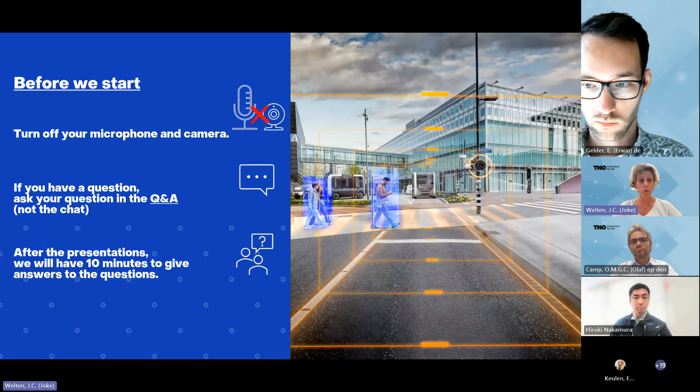So what's the program of today? Olaf will start with a short introduction to safety assurance. Then Erwin de Gelder will talk about the regulations and standards. We have a guest, Hiroki Nakamura from JARI, and he will talk about the Japanese AD safety assurance regulations and standards. Afterwards, Erwin will talk about the opportunities, and we will close this session with the Q&A.

I would like to give the word to Olaf, the Senior Consultant on Scenario-Based Safety Assessment and Methods at TNO. Yeah, thanks a lot, Joke.

Today my task is to give a short introduction to the main topic, which will be standards and regulations around safety assurance of automated driving. I would like to do that by reflecting on our webinar from June 3rd, the first in this series, where we discussed safety assurance of automated driving systems, and especially the complexity around answering the question of whether an automated driving system is safe or unsafe. That is a complex question because of the ecosystem that the AD system needs to work in.

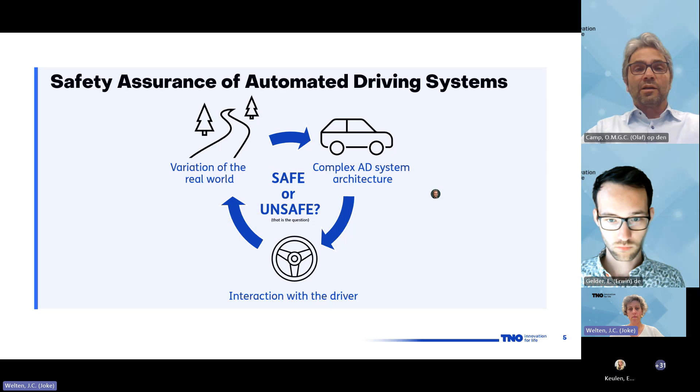So what did we learn from the first Meet the Expert session? First, we discussed different concepts of safety for automated driving systems. We were also happy to have a guest from Volvo Cars, Mikael Ljung Aust, who shared the considerations that Volvo takes in developing AD systems.

He mentioned that specifically for the safety argumentation, there are two points that need to be dealt with. First, an AD system should not repeat the errors that humans possibly make on the road—in that way we could move away from the typical human errors that cause conflicts on the road. But on the other hand, since a new system is being introduced, we should avoid that this system also makes new, so to speak, robot type of errors.

Safety assessment was also put in a Safety-II perspective. That is a concept about 10 years old, where we make a distinction between Safety-I, avoiding that things go wrong, and Safety-II, which indicates that we look at the capability of a system to deal with all the possible variations in operation, making sure that as many things as possible go right. For AD systems, that is something really to consider in addition to the Safety-I perspective.

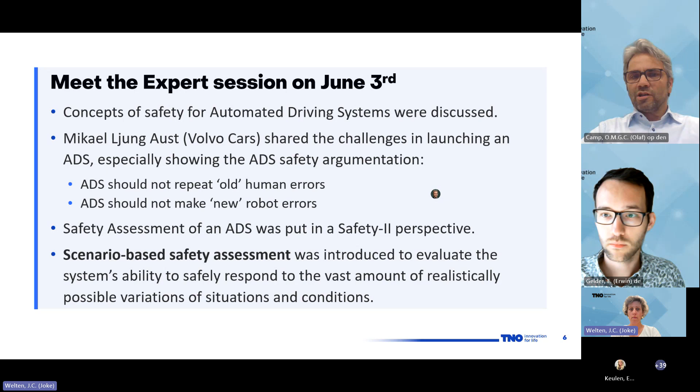Now, how do we deal with that? It was already mentioned that we do the evaluation of the safety of the system based on scenarios. So there's a scenario-based safety assessment methodology to evaluate the system's ability to respond in a safe way to all these different situations and conditions, and the variations thereof, on the road.

Now, the UNECE, and especially the Working Party on Automated, Autonomous and Connected Vehicles, GRVA, already proposed guidelines on how to perform such a safety assessment in a new assessment test method for automated driving. They propose a multi-pillar approach that starts from scenarios.

Scenarios are identified to describe what situations the vehicle can encounter on the road, what are the typical variations thereof, and to use those scenarios to describe the operational design domain—what are the situations that the system is designed to operate correctly in—and to develop the test scenarios used in this safety assessment to check if the vehicle is indeed capable of responding appropriately.

Different test methods are being proposed, which will be used at the same time: virtual simulations, which become more needed to deal with all these large variations, but also proving ground tests for physical testing of the system, and real-world testing where we put the system under test on the road to experience its actual behavior. So that's 3 of these pillars.

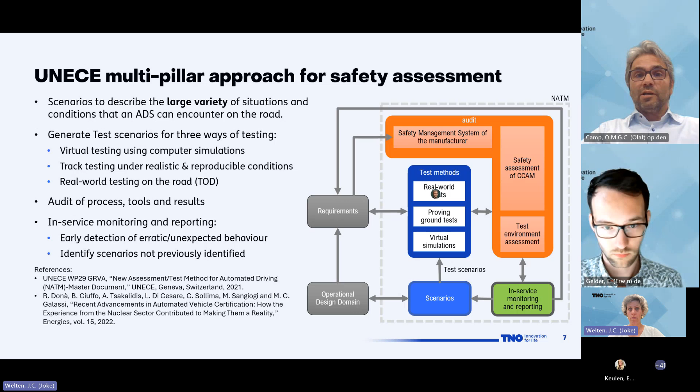Now, this is a very well developed guideline on how to perform safety assessment, but it's not a regulation yet. And still, we also see that there are already a lot of regulations and standards out there that help us develop safe systems.

However, there are a large number of regulations. We know a lot of them from UNECE and from the European Commission. We will also learn today about the regulations and standards and how to deal with that in Japan. But even with those international regulations, there are also national and local laws we need to abide by. So it's not only a large number on the international scale, there's still also a translation needed to the national laws, rules, and regulations.

And when we talk about regulations and standards, we also need to understand the role of international standards in this complete scheme of dealing with these regulations. There are also a large number of standards which are applicable to our assessment. It might be an open door to say, but it's very difficult to see the forest for the trees. One of the main challenges is: if we know what regulations and standards we need to abide to, how do we operationalize them?

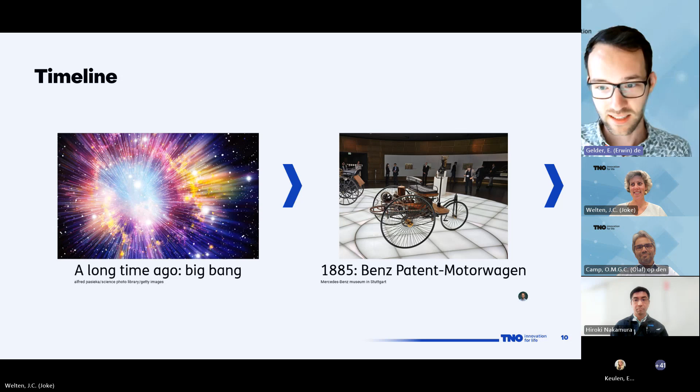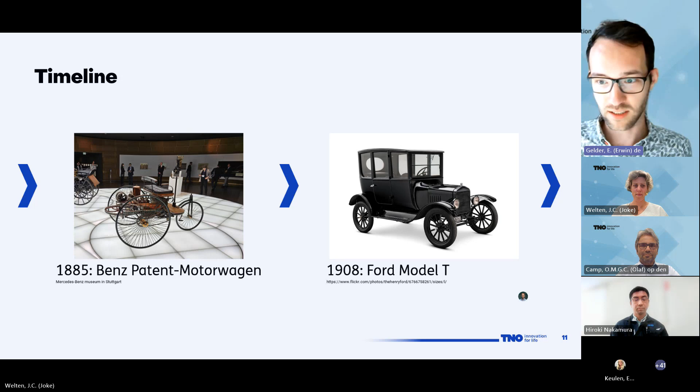A little bit later, we had the first vehicle available to the masses. This was in 1908, the Ford Model T. So more vehicles entered the streets, and that's also where rules came into force. More rules were adopted.

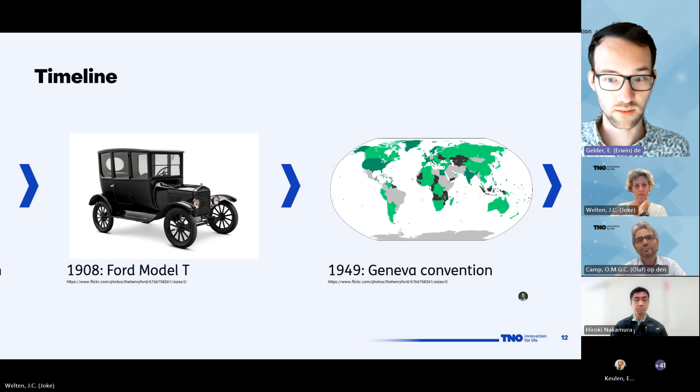A major milestone regarding the development of traffic rules and vehicle rules was the Geneva Convention in 1949. This was the first international agreement, so to say, on traffic rules and vehicle rules. Many of the national rules we have today are based on this convention, as well as the Vienna Convention, which was in 1968. This was an update of the Geneva Convention to further harmonize traffic rules and also vehicle rules around the world.

There's an important thing in both these conventions, and that's the concept of a driver. A driver is defined in such a way that it really needs to be a human behind a steering wheel. So clearly a driverless vehicle is incompatible with both these conventions. That's also why some changes are needed, and I will come back to that later.

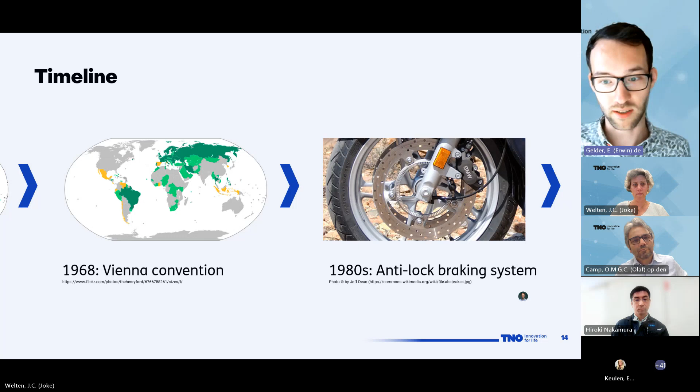More vehicles and more developments led to more safety systems. In the 1980s, we had the introduction of anti-lock braking systems. In the 1990s, we had electronic stability control and adaptive cruise control, which further increased safety as well as comfort for drivers.

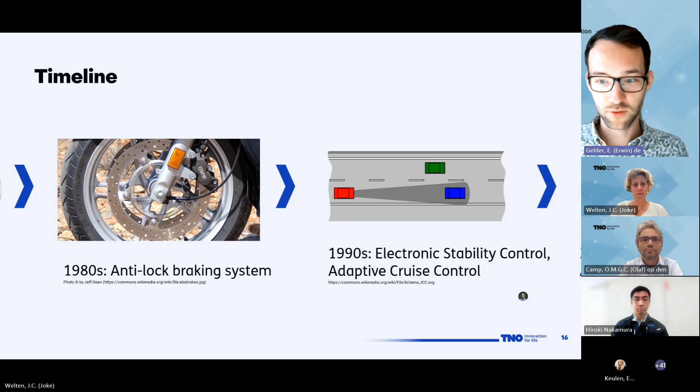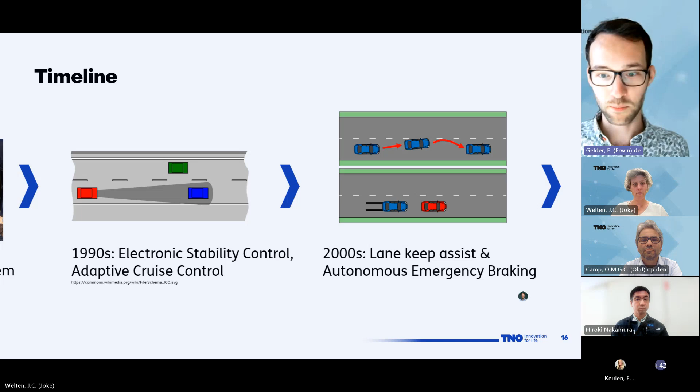In the 2000s, we had the introduction of lane keep assist and autonomous emergency braking. So vehicles became more and more automated. Drivers were still in control, but this naturally would lead to what we call self-driving vehicles.

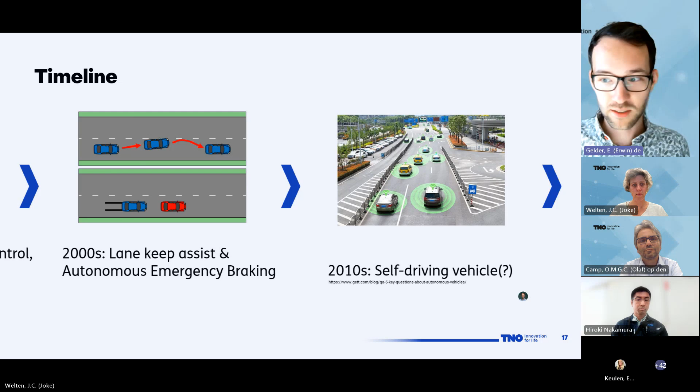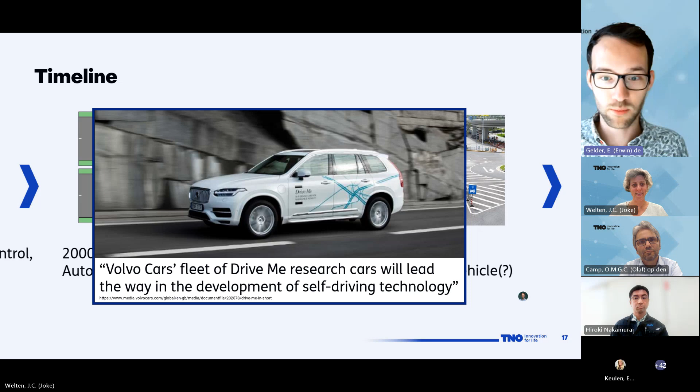That was the promise in the 2010s. Maybe you still remember Volvo's Drive Me research project, where they announced they wanted to drive in 2017 with around 100 vehicles fully autonomously in the neighborhood of Gothenburg. Also in Singapore, autonomous vehicles were announced, for example buses and taxis for last mile transport.

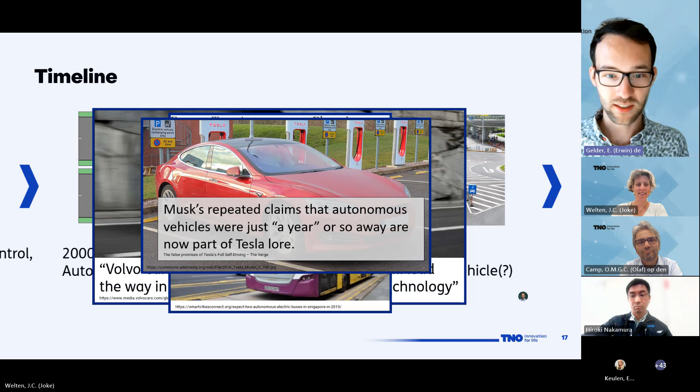And you also know what Elon Musk said. He said repeatedly that autonomous vehicles were just a year or so away, and this is now really part of the Tesla lore. What do all three of these things have in common? It's that it didn't happen. The question is, why didn't it happen?

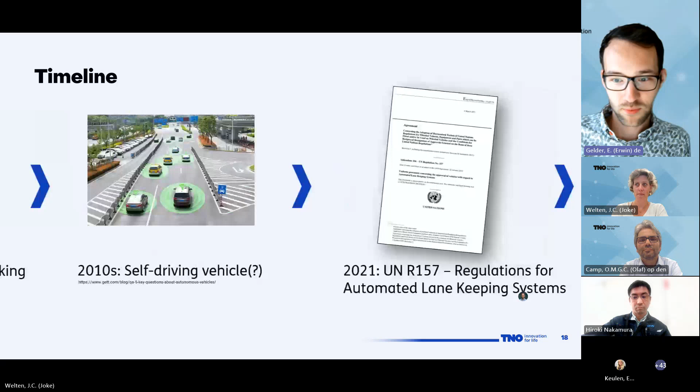For that I need to go a little further with the timeline. In 2021, there was a major milestone for regulations. I already mentioned driverless vehicles were actually impossible according to the Geneva and Vienna Convention. This was the first regulation for the type approval of automated driving systems, or in particular automated lane keeping systems, for which the system is responsible for driving and not the human anymore, of course when the system is activated.

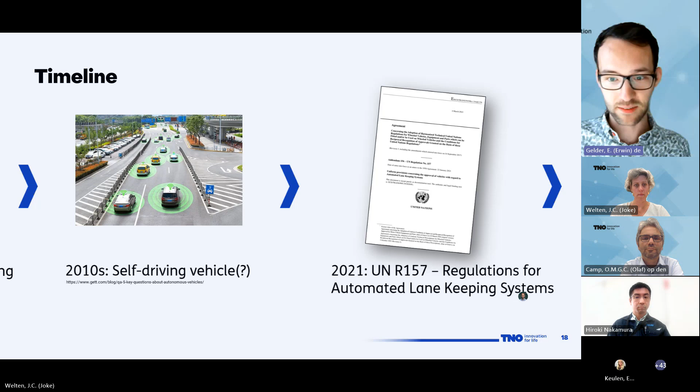I want to go a little deeper into this regulation. For example, it says in 5.1 that the fulfillment of the provisions of this paragraph shall be demonstrated by the manufacturer to the technical service. And going deeper, 5.1.1 says the activated system shall not cause any collisions that are reasonably foreseeable and preventable. I think we can all agree this is good - the system should be safe and not cause collisions we think it could prevent, and this should be demonstrated. The problem, however, is it does not really explain how we should do this.

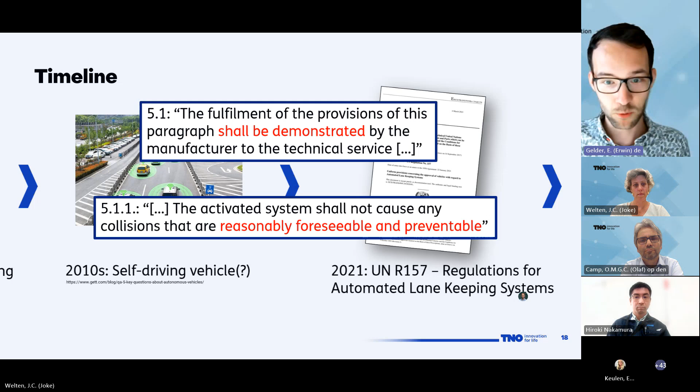That's my first takeaway that I hope you remember after this talk: it's unclear from this regulation how this should be operationalized. But okay, developments are still going on.

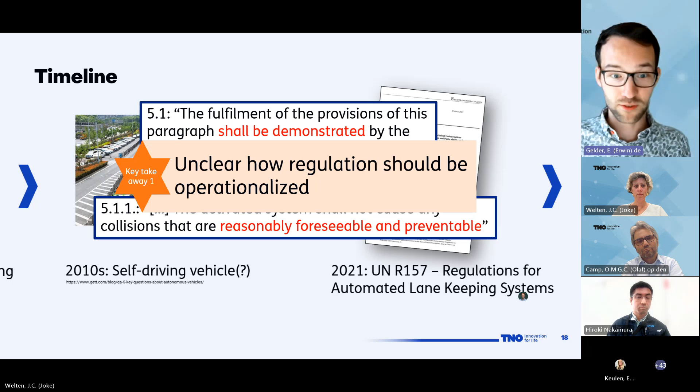Going a little further in the timeline, in 2022 there was a regulation on the EU level, regulation 2022-1426, on the type approval of automated driving systems. Again this is a major milestone because UNR 157 is only for automated lane keeping systems, while this is for type approval of automated driving systems, also level 4. So it goes a little further.

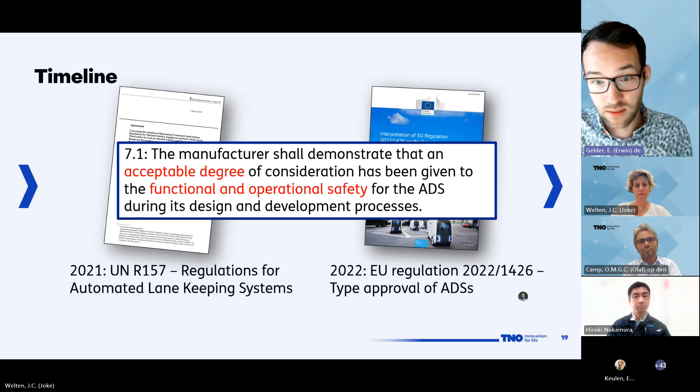Going deeper into this regulation, for example 7.1 says that the manufacturer shall demonstrate that an acceptable degree of consideration has been given to functional and operational safety. Again I think we can all agree this is a good thing. The problem, however, is that it's a little unclear what it means - what does 'acceptable degree' mean? That's my second takeaway: it's unclear what exactly the required level of safety needs to be. That's not specified in this standard, or regulation, I have to say.

I already mentioned standards, and that's maybe what can help us here. The regulations are not really clear how it should be operationalized, and the level of safety is also not clear. Can standards help us here?

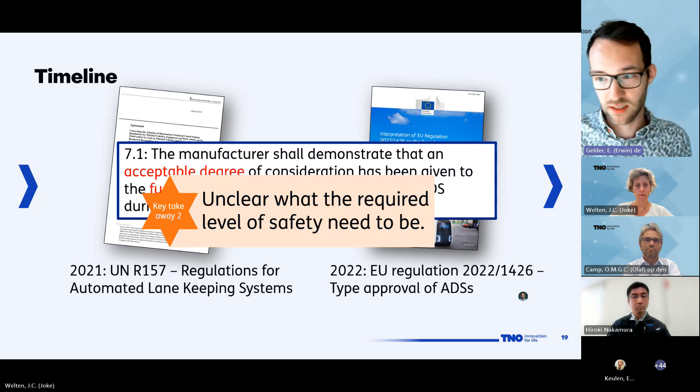Maybe, because there are many standards - over 500 automotive standards, for example ISO, SAE, IEEE standards, UL, ANSI, and also at the UN ECE level. However, most of these standards address ADAS, Advanced Driver Assistance Systems, concerning SAE levels 1 and 2. So that's not really what we are looking for today.

But there are some notable exceptions. For example, we have ISO 26262 on functional safety, ISO 21448, also known as safety of the intended functionality, and the ISO 3450X series, which is dedicated to SAE level 3 and above and is on test scenarios of automated driving systems. We have the almost-published ISO 8800 on safety and artificial intelligence, and also UL 4600, which is on the evaluation of autonomous products. So there are clearly some developments here.

Now, what I could do is go into each of these standards and explain what they are about, but then this meeting would take much longer, and I think it would also be a little boring. I hope this will be a bit more entertaining than that, so I will not do that.

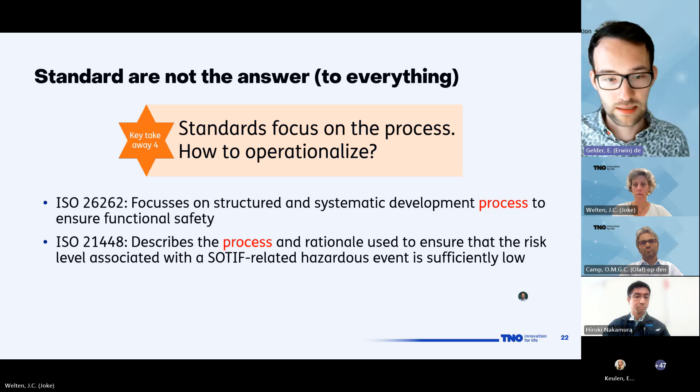My fourth key takeaway is that these standards focus on the process, so it's not really clear how to operationalize them. For example, in ISO 26262, it really focuses on a structured and systematic development process to ensure functional safety. And ISO 21448 describes the process and rationale used to ensure that the risk is sufficiently low. Another example, ISO 34502 says the relevant scenario space shall be specified. Yes, that's of course very important, but it does not say how to do that. So it's not really clear when you comply with such a clause.

This is not really criticism from my side of these standards. I also think it makes sense - it doesn't always focus on operationalization, because that would also kill innovation. Still, I think there are some gaps here that need to be addressed before we can further enhance automated driving.

Then my last key takeaway is actually a repetition. As I mentioned, in the regulation it is not really clear what the required level of safety needs to be, and unfortunately these standards do not really help here. They provide some guidelines - UL 4600, ISO 21448, and also ISO 34502 provide some guidelines on this - but they do not give acceptance criteria. So it's still not really clear what the required level of safety is.

So just to summarize: it's unclear how regulations should be operationalized. It's also unclear what the required level of safety needs to be. It's unclear which standards are going to be adopted by the regulations, if any. And also the standards focus on the process, so it's not straightforward to operationalize this.

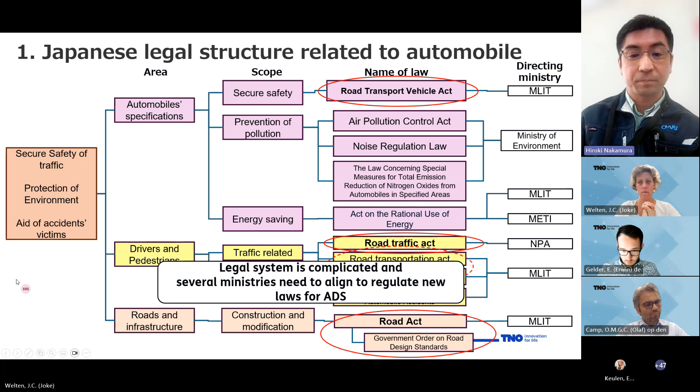Next, I will briefly introduce the ADS regulation in Japan.

First, ADS is defined as follows in the Road Transport Vehicle Act in Japan. The automated driving system is defined as a device which can operate a car automatically, equipped with necessary components such as sensors, calculators, and programs, meaning it is defined as a replacement of a human driver. It also requests ADS to replace all driving tasks, covering not only perception and prediction judgment, but also control under the conditions MLIT has authorized. Another issue is that the logger is required for ADS.

I think the structure of this regulation is that there is already a type approval system for the control part as a product of the manual driven car, so it only added some requirements for the perception and judgment part.

Also, in Article 48.2, an automobile equipped with ADS shall comply with the regulation, which also includes the Road Traffic Act. So as a driver, ADS shall also comply with the rules.

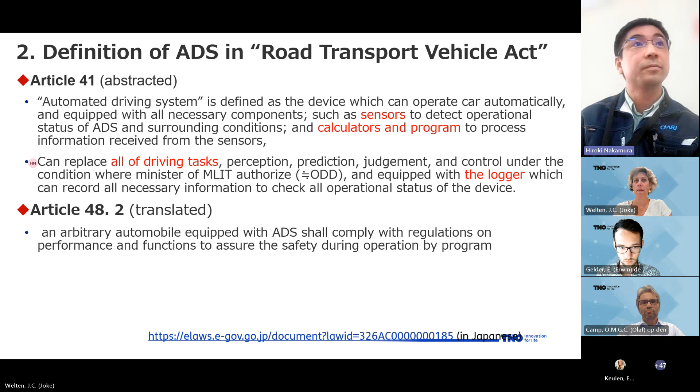I would like to mention the UNR 157 automated lane keeping system. As Erwin has mentioned, many participants already know about this, and it is also accepted in Japanese regulation. The Japanese government has accepted nearly 100 UNR acts, and as Erwin also mentioned, regarding the Geneva and Vienna Conventions, the Japanese government has also signed these international agreements. So in general, the status is similar in Japan compared to the EU.

I would like to add some topics related to the recent update on ADS regulation in Japan. Last week, it was announced that guidance for ADS safety assurance was issued. I thought this might be a good trigger for today's discussion, but unfortunately it wasn't something I expected. Still, I think there are some points to be clarified, and the major contents are extracted here.

There are mainly 3 topics. The main issue for the government right now is to shorten the authorization procedure, mainly for field operational tests—not ready for personal own vehicles yet. The simplified authorization procedure previously took about 11 months to authorize field operation tests in Japan, because it was all checked by the national government with limited workforce. Now they are aiming to shorten it to 2 months and distribute the tasks to local governments. So that was one big change.

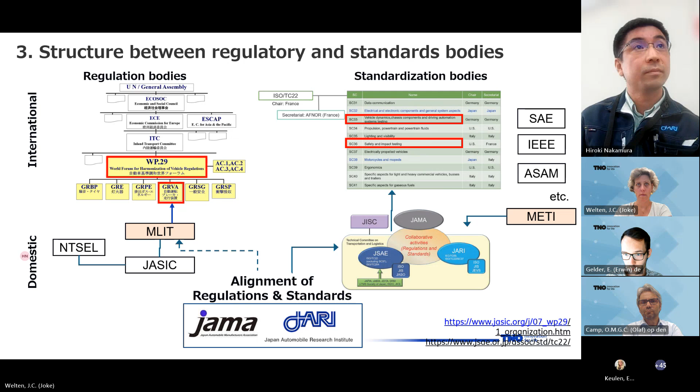So from here, I would like to give some Sakura achievement as an example to bridge the gap between qualitative requirements of the regulation standards and make it more specific measures.

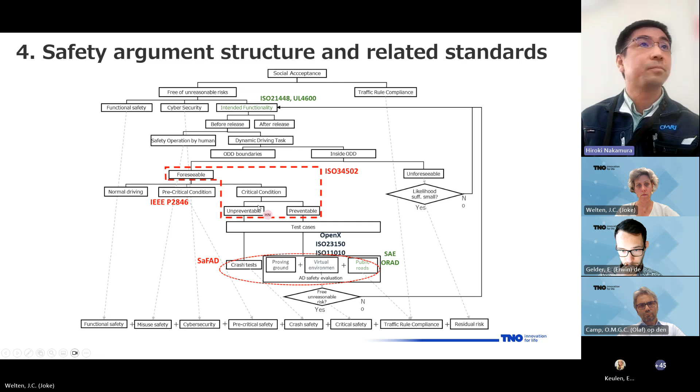More specifically, there are 3 steps to provide the concrete scenario for the test case. The first step is to provide a qualitative interaction pattern as a functional scenario. The second step is to provide the parameter space for each functional scenario as a logical scenario. The third step is to select specific parameter combinations as a concrete scenario. For this scheme, we are preparing specific scenario catalogs and also a parameterization process.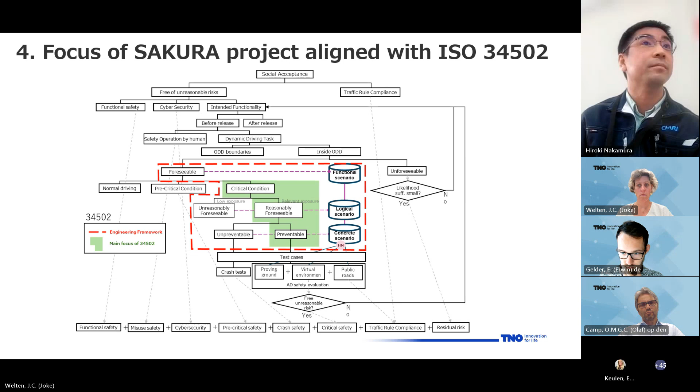This is the main achievement of Sakura and JAMA's work - we have provided a safety evaluation framework by dividing the driving task into 3 independent tasks: perception, judgment, and control, and defining the critical situation for each task. If you combine all the possible scenarios, you get all the possibly exposed scenarios. This framework is also reflected in ISO 34502.

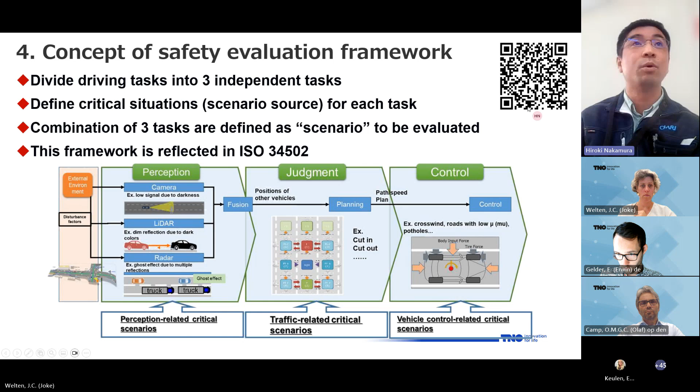If you click or capture this QR code, you will get the detailed document. I'm afraid I'm running out of time, so I will skip the detail of each scenario.

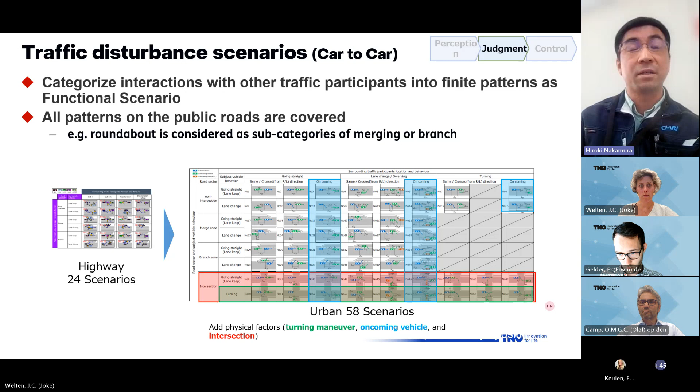One point I want to mention is that for traffic disturbance scenarios, car to car scenarios, we have summarized 58 urban scenarios. I think this is the most comprehensive and specific scenario catalog at this point, as far as I've checked. We have also recently updated the pedestrian scenarios.

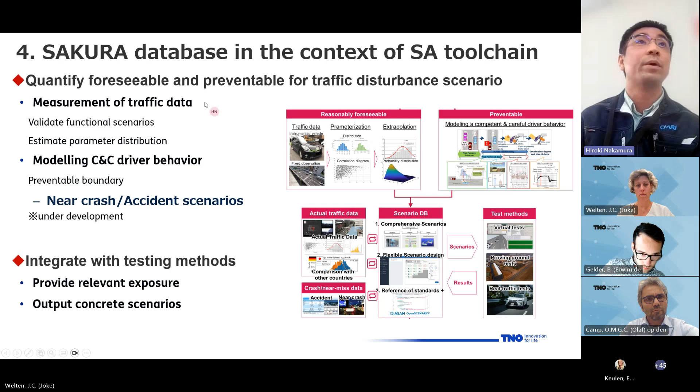Two more points I want to mention: the scenarios are still qualitative, so when we want to connect with a specific virtual platform for simulation, we are developing the Sakura database as a tool chain.

I understand there are some unclear points for the regulations and the ODD, so we are also developing a tool to extract related regulations and scenarios from a specific ODD. If a user selects a specific route as an ODD, they will get the relevant scenarios, and for each scenario they can also check the traffic rule relevant to it.

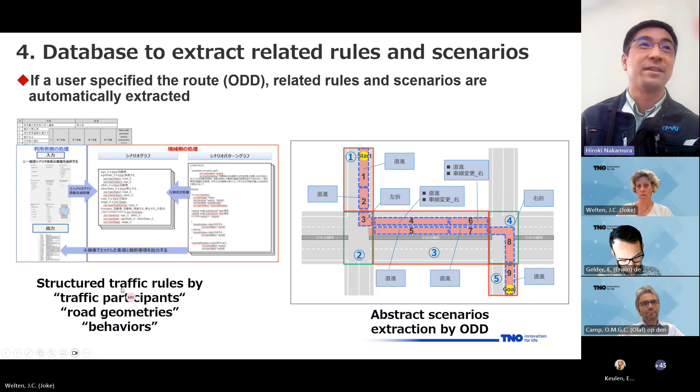So that's what I think is one important achievement from our side. But still, I understand that if you get some specific sentence from the traffic rules, they are still qualitative and sometimes unclear, but it will still help.